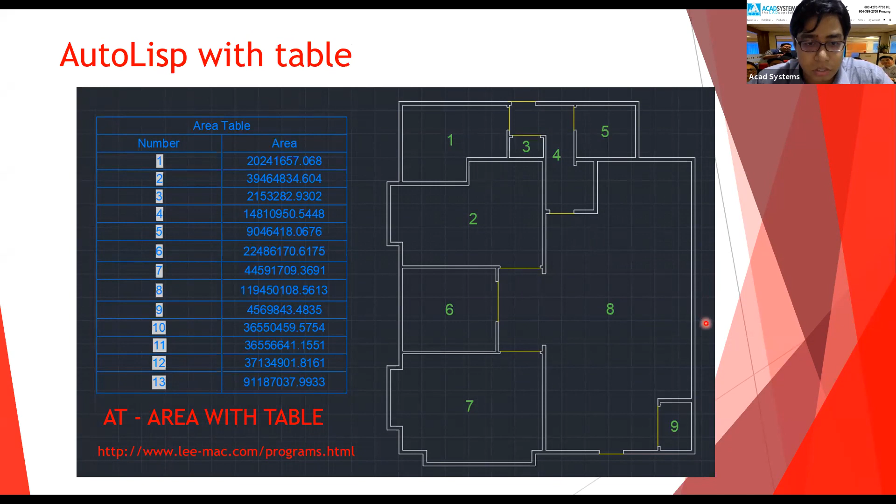Saya akan share saya punya AutoCAD. So the first one, kita akan pakai normal step dekat dalam AutoCAD. Masuk dulu kat sini. Saya akan tunjuk 3 cara ni ada calculation. So the first one will be the measure command. Saya boleh just type in.

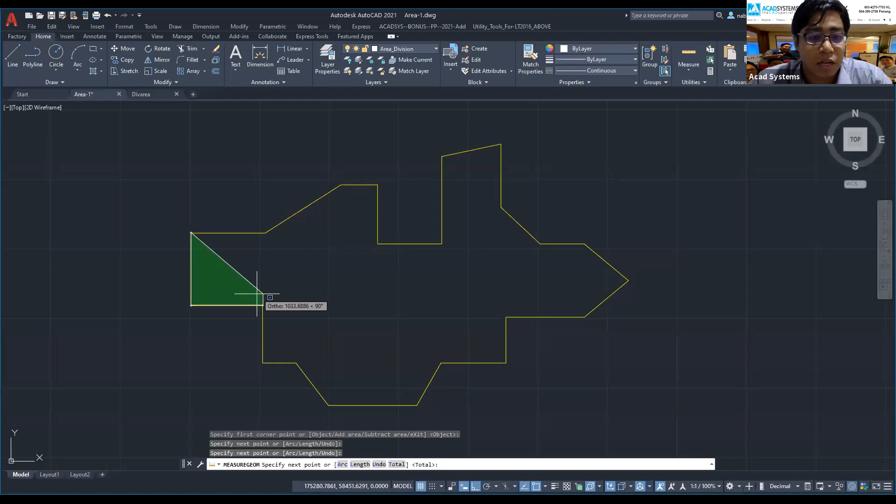MEASU, so measure geom, that will be command untuk this particular. Tekan je kat sini and then pilih area kat bawah ni. Pilih area and then you akan pilih endpoint. Kalau you tengok kat sini bila saya klik saja, yang warna hijau tu adalah area. Dia akan calculate based on area yang kita highlight tu.

Kalau you tengok cara ni pun quite slow. Ni antara salah satu cara yang dah ada. Nanti kita akan proceed masuk Lisp, lagi senang. Saya enter, dia akan bagi area dekat sini. That is one way.

You boleh juga pergi dekat under measure kat sini, ada utilities, drop down measure, ada area. So this is the command. You boleh pakai ni pun tak apa. Satu cara lain juga measure geom juga, tapi you pilih quick.

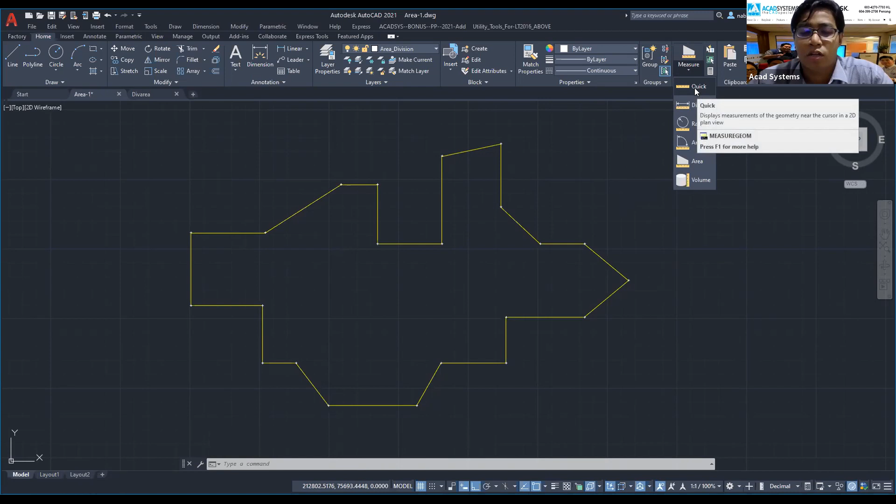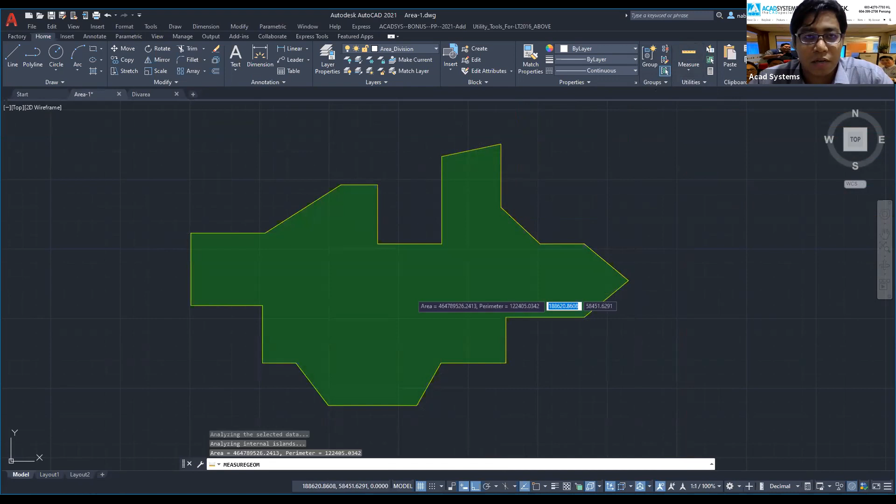Untuk quick ini just for your information. Quick ini just untuk 2021 sahaja, yang previously dia belum add, baru add untuk 2021. Bila you pilih quick, pilih terus tekan kat dalam, dia akan automatically highlight. Tak kisahlah kalau ada something macam curve, dia boleh terus dapat answer. Tapi ni just untuk 2021 saja, yang previous one 2020 still boleh pakai area.

So let's move for the second one, which is the object properties and list. Tadi kita dah masuk satu, kita nak masuk nombor 2 pula. Ada 2 jenis command, which is PR, stand for properties. The second one will be LI, which stand for list command. Masuk pula.

Untuk nak buat ini, you kena ada close loop. So you boleh just type in join. Kalau you tengok kat sini dia tak close, so dia tak boleh nak create, so you kena joinkan dulu. Enter.

And then you boleh type in PR for the properties command. Dia ada keluar, so select sajalah boundary ni. Dia akan highlight dan bagi area. That is your answer kat situ. This is the result.

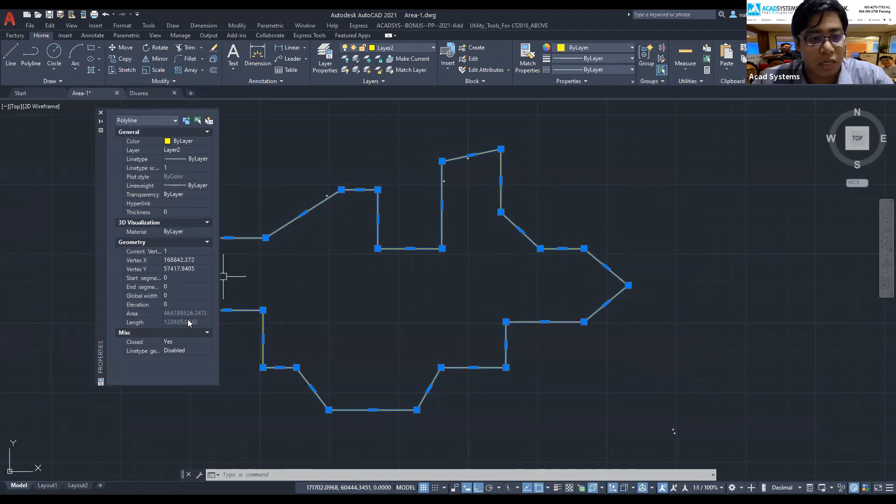Same goes with list command. Type in LI, which stands for list, enter, select, dan dia akan keluar, enter. Dia akan listkan information kat sini, this will be the area information. Kalau objek yang macam ni quite easy.

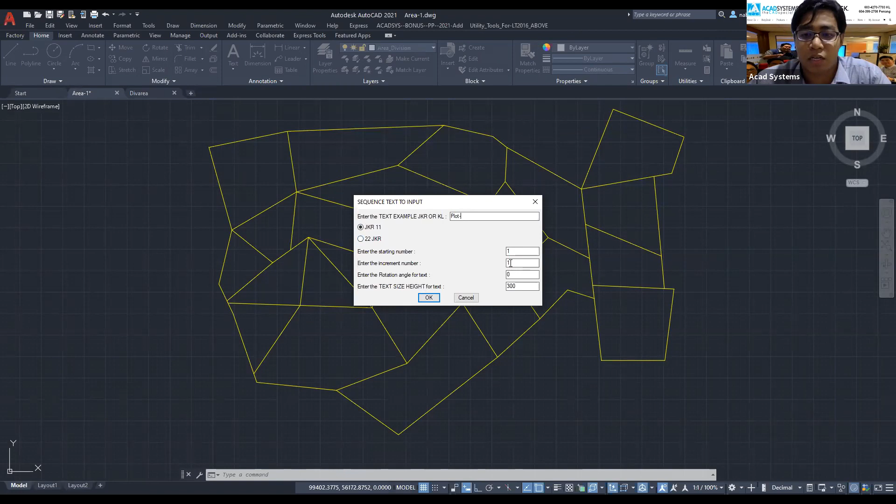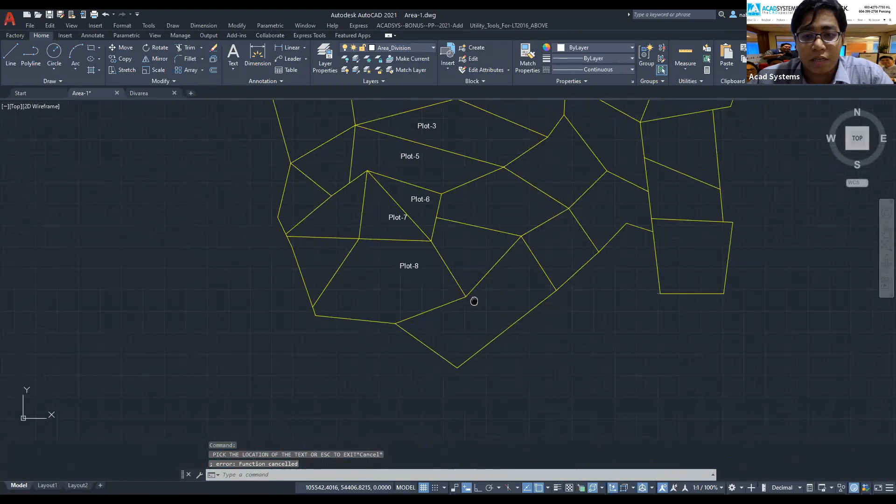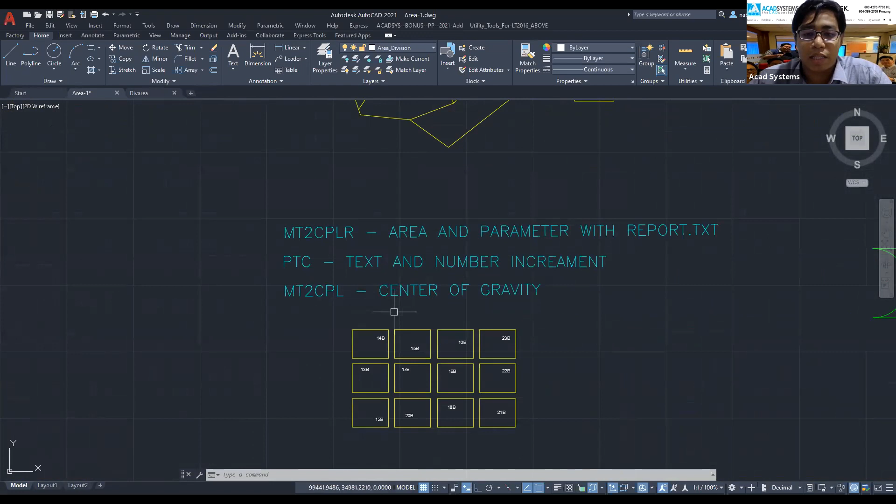Right, so fast forward, kita dah ada something macam ni. Kita nak create dia punya area dan juga parameter, kita akan buat kat sini. Tapi kalau you tengok, satu part ni ada dekat bahagian tepi, satu teks duduk bahagian kiri, ada di bawah, so dia berserabut. Ada juga command untuk kita organize dia, semua letak dekat tengah-tengah. For this kita boleh pakai command ini, which is the center of gravity. This is one of the AutoLISP, MT2CPL.

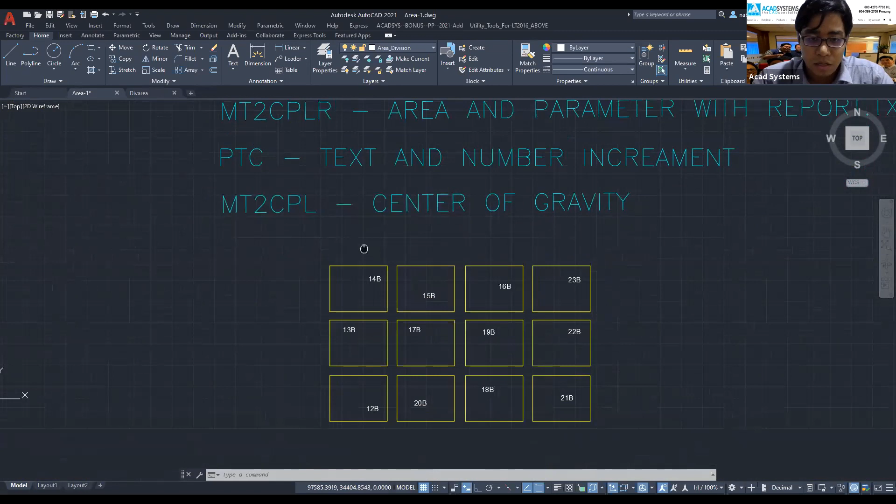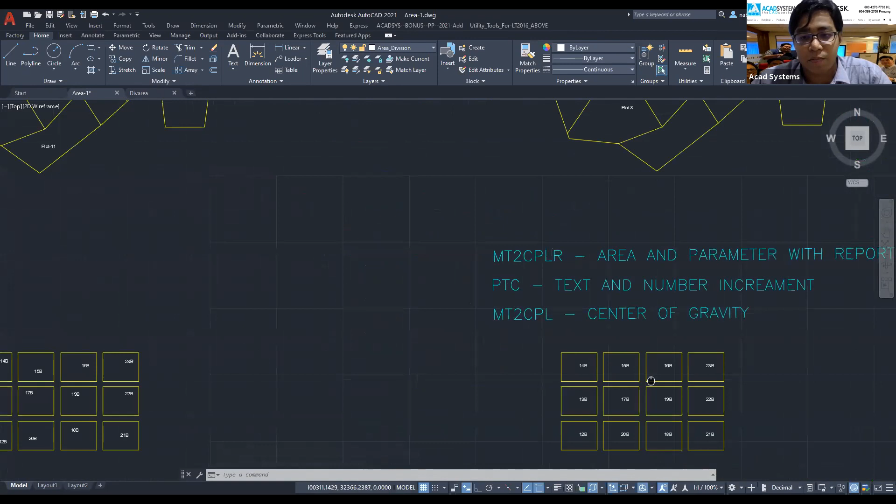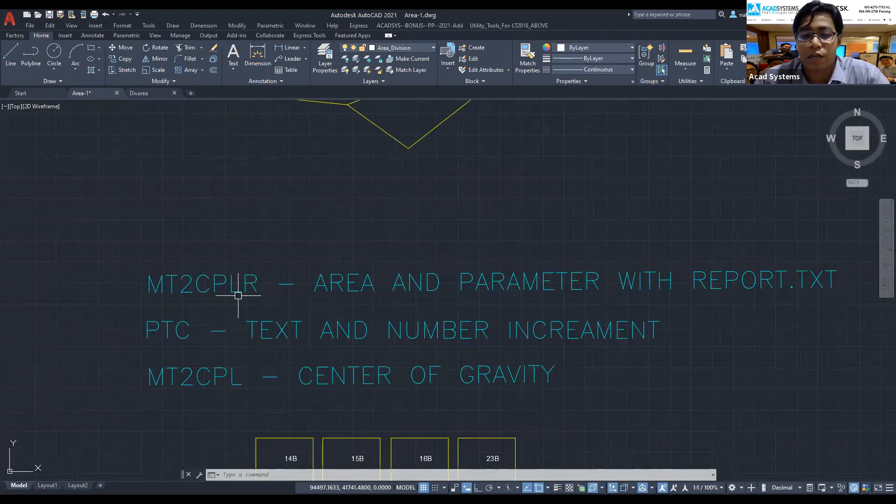Kalau you tengok contoh kat kotak ni, saya tulis MT2CPL, saya select saja semua, then boom, dia akan automatically select dekat tengah-tengah. For this case, saya nak buat area and parameter, so saya boleh skip center of gravity sebab command untuk area dan parameter ni dah apply sekali untuk center of gravity, sekaligus saja terus boleh dapat semua sekali. So the command is MT2CPLR, dan dia akan generate report as well, kita akan tengok nanti.

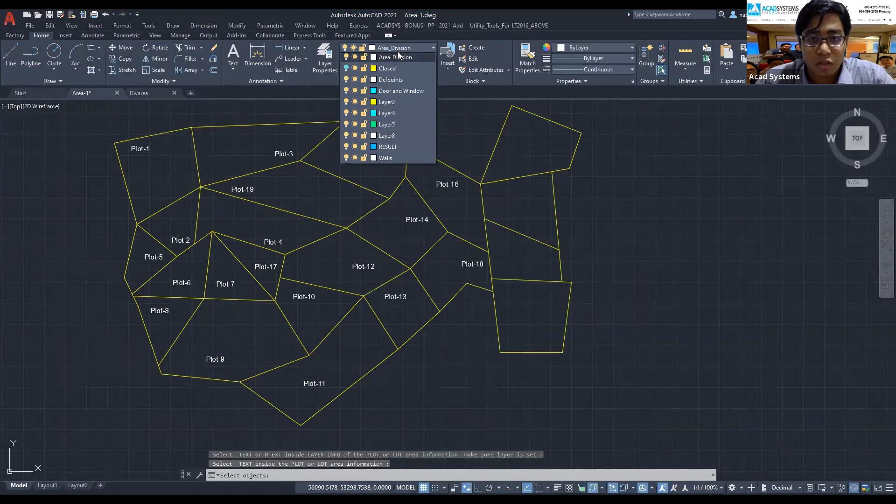Yang ni dia macam serabut, so just apply saja dia punya area calculation. MT2CPLR, enter. Dia akan minta supaya pilih teks, make sure saya set area yang betul. Saya nak area dalam result. Pilih semua dia, dan enter. So you boleh nampak, sekaligus terus dapat dia punya answer, result kat sini, dia punya plot, area, parameter.

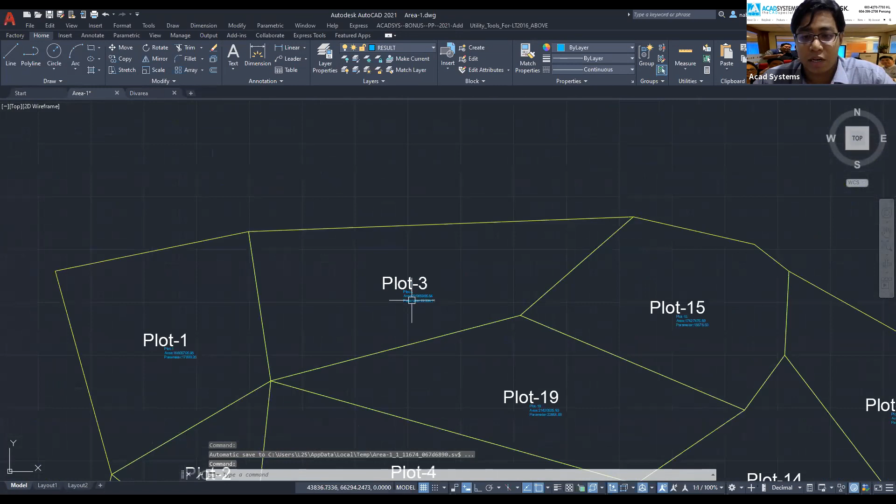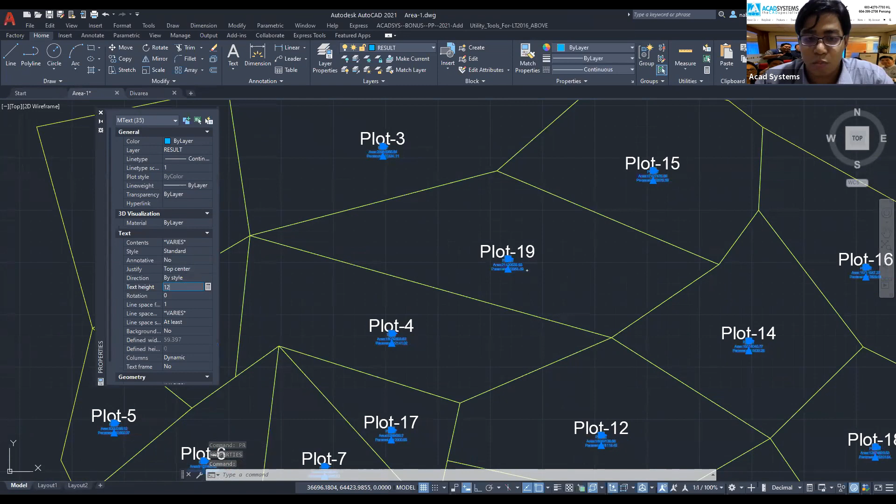Let's say kalau you nak ubah tengah-tengah semua ataupun you nak besar sikit, so no problem. Tekan je kat sini, right click, select similar, semua dia select. You tekan PR untuk adjust dia punya text. Habis saya nak justify letak tengah-tengah, dan saya nak bagi besar sikit text height dia, 120. Much better. Macam yang saya cakap tadi, yang ni also dia akan generate report. Not only dapat area dan parameter, report pun dia create sekali, satu command saja dia apply untuk semua sekali.

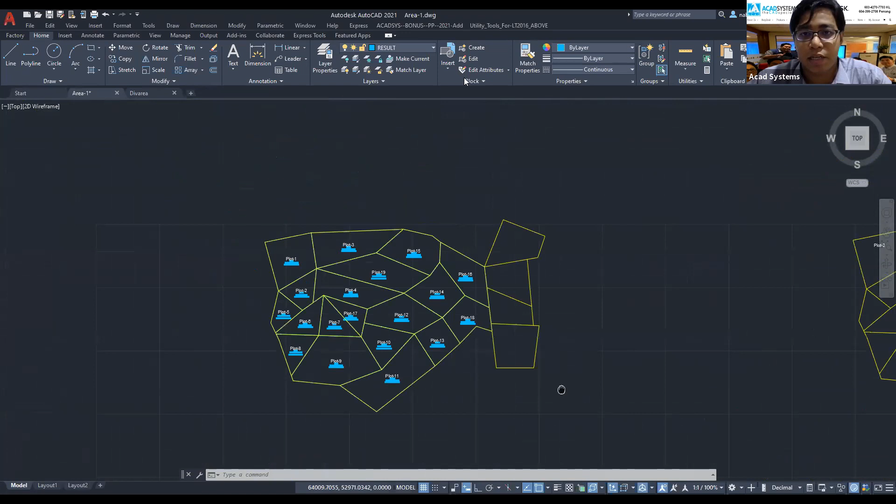Saya akan share dia punya report, dia akan send dekat dalam text file. So this is the text report, you boleh nampak dia punya plot 1, 2, 3, area dan juga parameter.

Untuk ni kita nak masukkan dalam Excel supaya lebih senang. Excel quite easy, saya akan share macam mana nak buat. Okay, you boleh tekan open saja, open, browse for that particular text file, ini. Make sure dia dalam all file sebab you nak tengok text file.

So this is the result tadi, semicolon sebab saya nak divide by area, and finish. So you dah boleh nampak dekat sini, area dan parameter, dia dah sort automatic ni 1 sampai 19, dia punya numbering pun dah sort elok.

Okay, let's say kalau you nak update lagi, you nak tambah lagi, so no problem, cumanya you make sure you delete dulu yang ni, ini kena delete dulu sebab you just nak update saja. Nak delete senang, so klik saja, right click macam tadi, select similar, dia select semua yang sama, tekan delete.

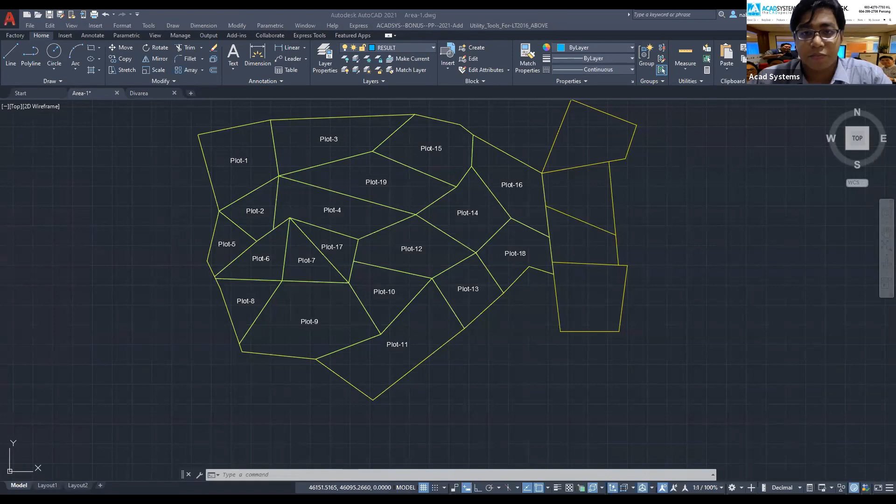Saya boleh just pakai PTC, tapi saya malah nak tulis lagi plot ni, saya boleh just type in PTC1. Maksudnya PTC1 ni allow untuk continue daripada previous text. Contoh saya pilih plot 18 ni, dan saya boleh pilih increment, saya tak payah tulis plot, terus saya dapat buat. Saya pilih yang ni, dia just sambung saja.

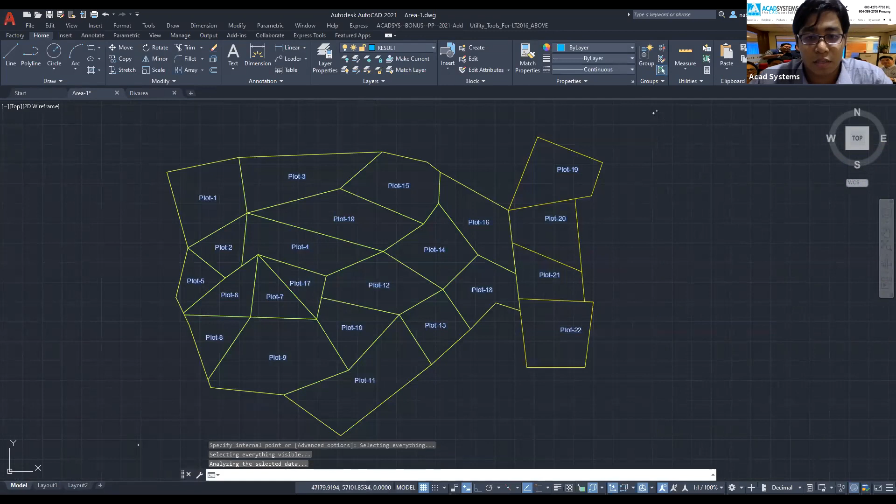So sama juga macam tadi, saya run balik MT2CPLR, saya pilih semua, dan dia akan create new one kat sini. So saya boleh check balik saya punya report, let's say kalau ada problem ke apa ke, dapat check balik. Okay, Excel, saya open balik, dan saya akan cari saya punya location for the last one.

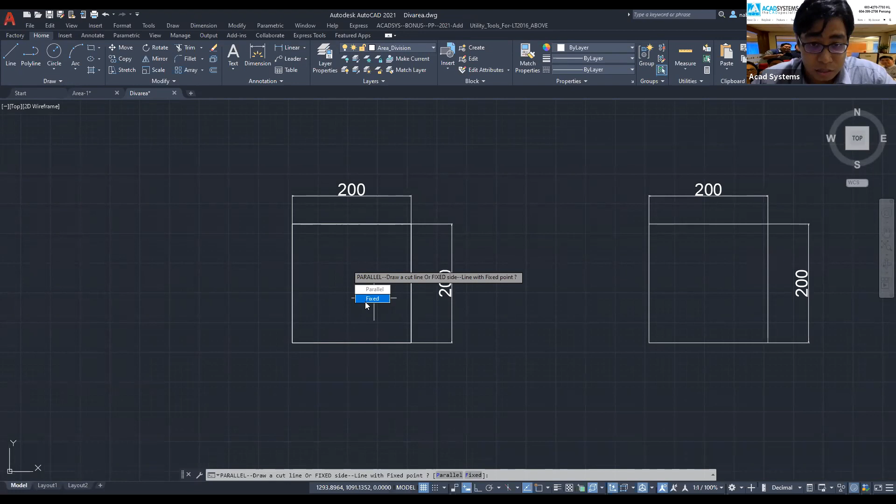Saya pilih divide. Ini saya nak divide berapa bahagian, maybe 3, 1/3 maksudnya. Kat sini dia akan bagi pilih sama ada saya nak parallel ataupun fix. So saya akan buat fix dulu, lagi saya akan tunjuk parallel. So saya pilih fix, dia akan minta untuk saya pilih point.

So saya akan letak point kat sini and create line kat sini. So that is line yang akan jadi sebagai calculation line untuk dia nak cut tu. So kat mana area 1/3 tu yang saya nak?

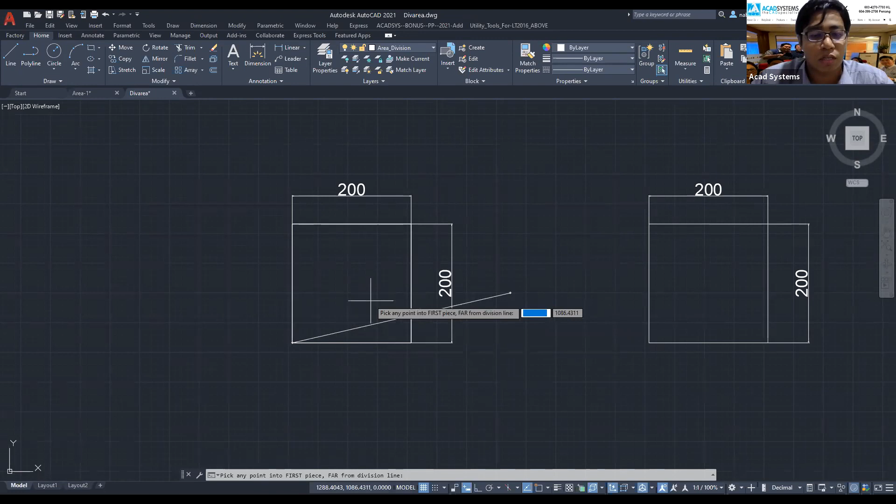Saya nak daripada bawah, so saya pilih daripada bawah ni, pilih dia direction dia. Anda you nampak dia tengah calculate ni, sikit dia naik. Right, sampai dia dapat dia punya answer dia.

So that is the answer kat sini. So you boleh dah run PR untuk dapatkan dia punya area dia. Okay, dia dah bagi dia 1/3 kat sini. So ada lagi satu which mean they... apa nama? Parallel. Okay, right, so saya run satu lagi.

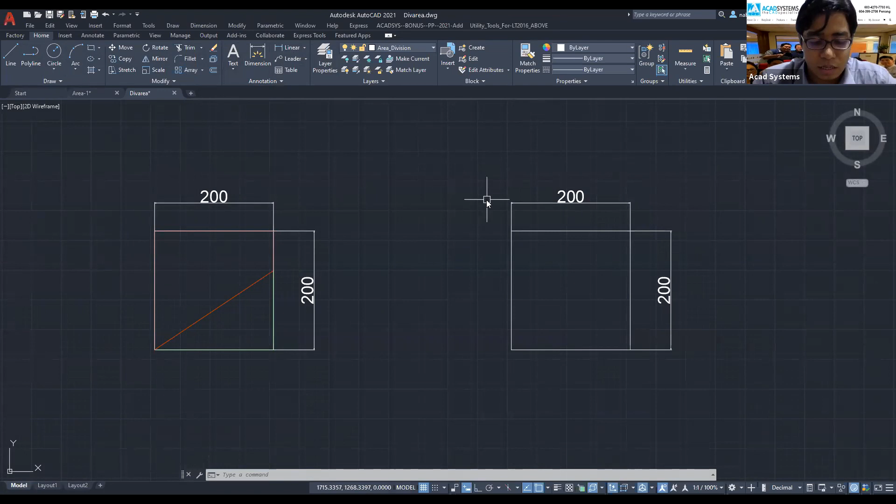Divide area, DIVAREA. Dia saya akan pilih point kat tengah ni. Pilih saya nak divide juga. Kali ni saya nak divide 1/4 maksud dia. And then saya nak pilih parallel. Saya pilih parallel, saya pilihlah line saya.

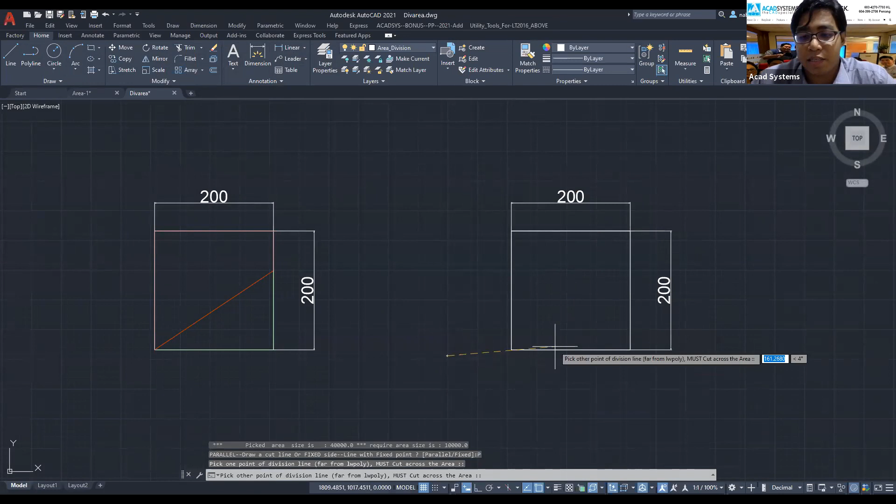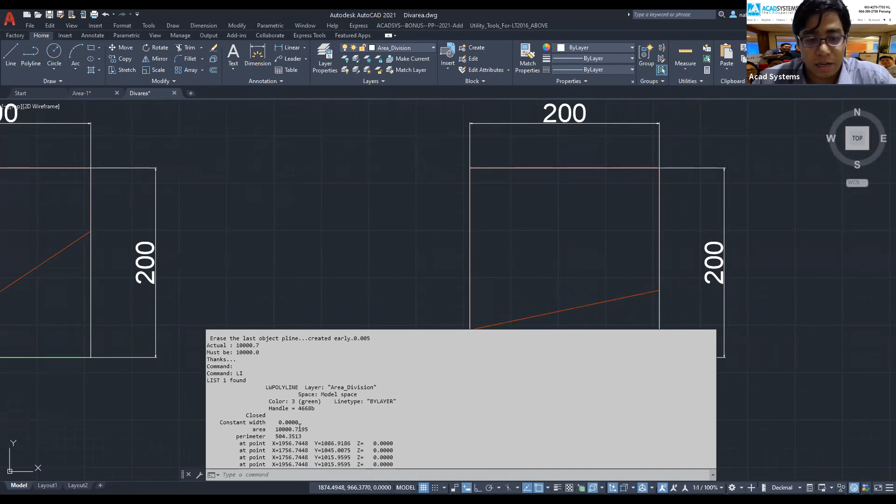Dia akan create based on this line. Dia saya pilih area mana yang saya nak, macam tadi juga. So, parallel from that area. So, you boleh nampaklah kat sini. Sama juga, saya boleh tekan list command. So, dia akan bagi result for this area.

So that is all yang saya nak share ni. So mostly hari ni adalah about the AutoLISP. So kita ada banyak lagi AutoLISP yang you boleh pakai.

So sambil-sambil tu menunggu soalan, saya akan share sedikit last part. Saya nak share pasal AutoCAD lah. So this is the AutoCAD for AutoCAD Full lah. So bila you beli AutoCAD ataupun AutoCAD Full, you akan dapat the industrial toolset kat sini. Maksudnya you akan dapat architectural toolset, electrical toolset, mechanical toolset and so on. So you akan dapat original one and also the industry specific toolset nya.

So you punya kerja lebih senang lah. Contoh you nak buat architectural punya drawing, you nak buat macam wiring diagram, you boleh pakai the electrical and so on. Okay, bila you pakai AutoCAD, you also dapat akses untuk AutoCAD on any device.

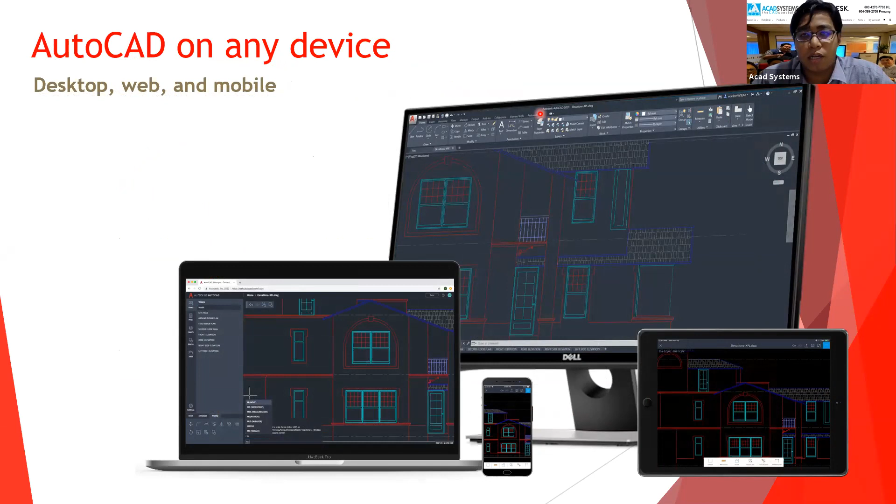So firstly, you boleh pakai AutoCAD dekat dalam desktop, of course lah. And then you boleh dapat AutoCAD dekat dalam website. Let's say ada certain komputer tu, dia tak ada AutoCAD dalam tu, and then you nak pakai dekat dalam website, you tak mau install. So you boleh dapat akses untuk AutoCAD tu. So you boleh just Google browser and use AutoCAD dekat dalam website.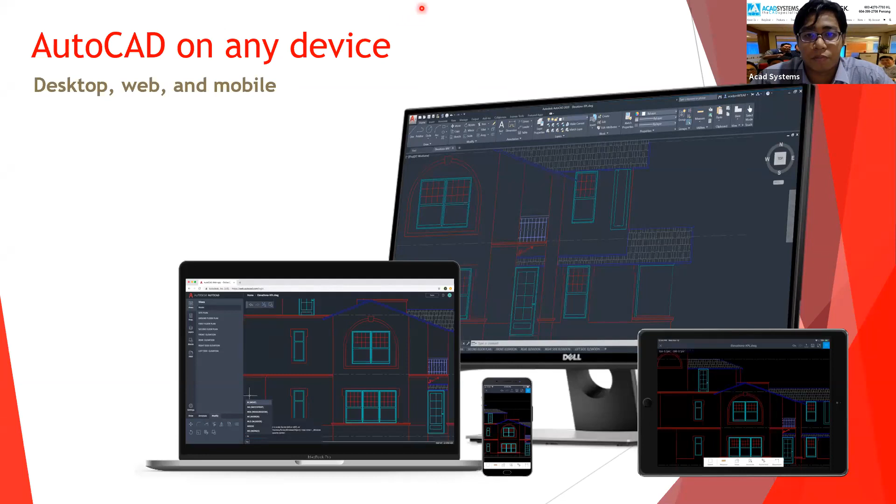And then of course mobile phone, so you boleh pakai AutoCAD dekat dalam mobile phone as well. So you boleh download dekat dalam App Store. Right, so saya share balik. Oops, sorry about that.

The second question, all these commands are only for AutoCAD 2021 or lower version are usable? Okay, so untuk yang Autolisp, semua jenis AutoCAD boleh available. Yang saya cakap pasal 2021 just measure ni saja, yang quick ni saja. Yang area ni semua boleh pakai, yang Autolisp semua boleh pakai.

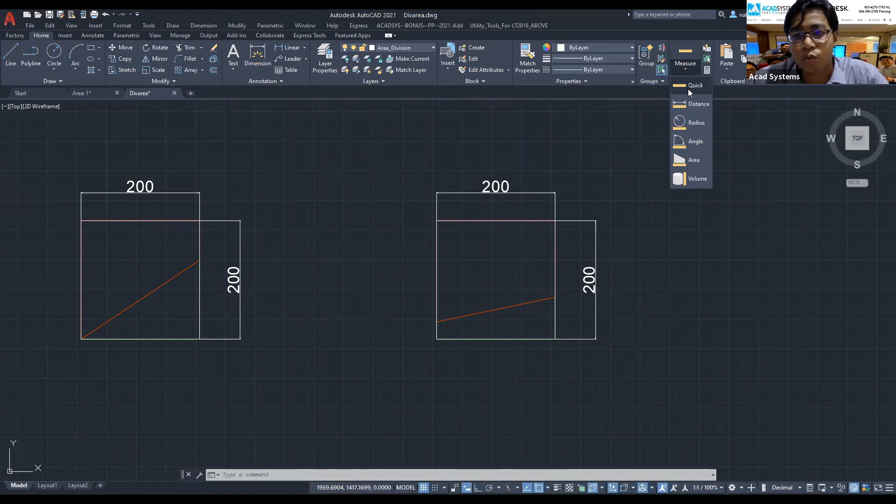Tapi yang untuk quick saja, ini just new update lah daripada Autodesk. Quick ni you boleh tekan saja dia terus keluar. Cuma yang ni saja 2021. So saya harap saya answer you guys punya question. Okay, so saya akan tunggu lagi, kalau ada apa-apa question just type in before saya end.